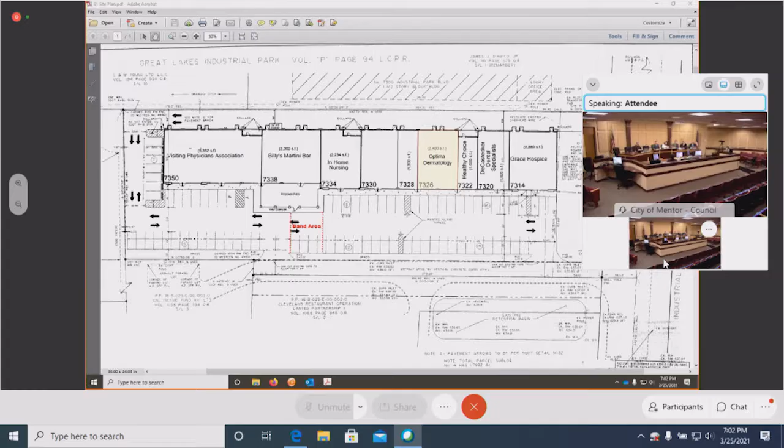Thank you. Please give us your name and address for the clerk. Yes, this is Scott Flivio. I'm the Director of Construction from Optima Dermatology out of Portsmouth, New Hampshire. Good evening, board members, thank you for this time. Thank you, please tell us a little bit about what you want to do. Yes, we're doing an interior fit up for a dermatology office. This is a temporary location where the doctor will visit their patients during the process of getting the new space prepared.

Okay, thank you. Is there anybody here that would like to speak in favor of this proposal? Larry? No one has put anything into the Q&A, but I do see the landlord's representative is online. I will unmute Urban now. Urban? Mr. Conaccione? I guess he does not want to speak.

Okay, is there anybody here that would like to speak in opposition? Okay, this public hearing is closed. Is there anything from the administration? Nothing other than what's been noted in the report. Anything from my fellow commissioners? All right, make a motion to approve? Second. Clerk, please call the roll. Mr. Tiedemann? Yes. Mr. Varga? Yes. Mr. Haddon? Yes. Mr. Perkovich? Yes. Mr. Cook? Yes.

Okay, we have a conditional use permit to allow a commercial recreational facility, karate and fitness studio, at 9107 Mentor Avenue. Is that applicant here? Larry? Oh, sorry about that, I don't see anyone for this request. There is a call-in user number 2, which I have just unmuted. If it's him. Oh, sir? There's a third call-in user. Oh, sir? Oh, they're gone. I don't see them online at all. You want to just come back to this then?

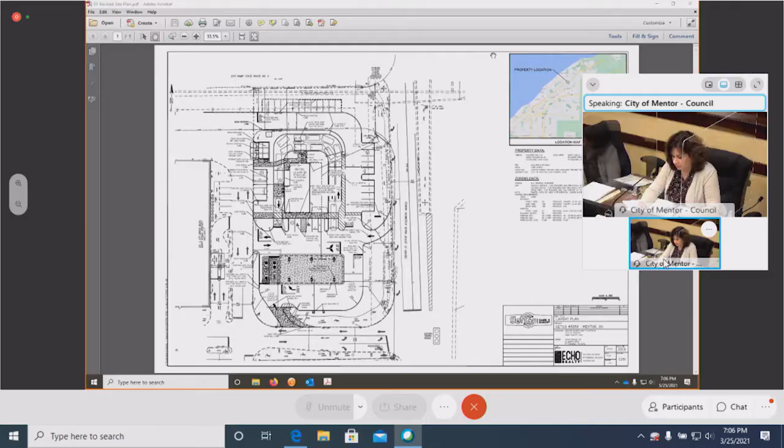Okay, thank you. Is there anything from the administration? Mr. Chairman, I would just point out the extension request that they submitted with regard to the previous site plan, final site plan approval that was approved at your March 5th, 2020 meeting, effective on March 27th, 2020. Per the code, the final development plan expires after 12 months unless an extension is granted up to 6 months. Okay, thank you. Is there anything from my fellow commission members?

I have a question I asked before, and I'm not sure I know the answer, so I'm going to ask it again. How is this building serviced? Where is the service location? How does a service truck approach the building?

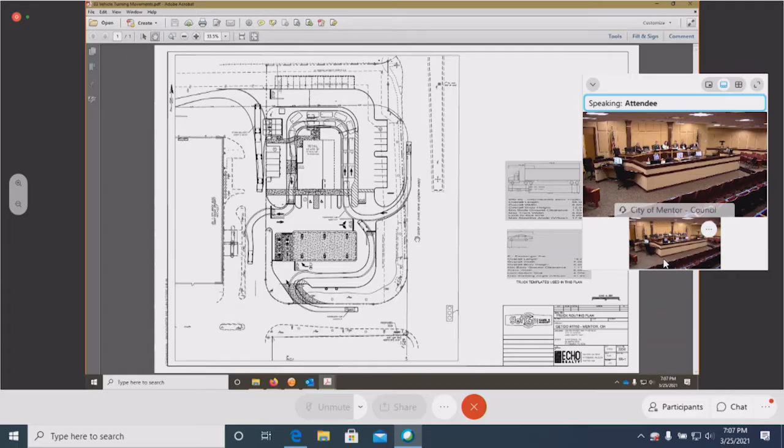If you look at the turning analysis, we show how vehicles and trucks could enter the site. These vehicles can pull up to the front of the building or to the side of the building to access it if anything needs to be serviced at the retail store.

Would that be taking place when the facility is open, when you have a drive-through condition going on? I'm just trying to understand how a panel truck or some type of delivery truck would be able to come in while you were having all this traffic going around the building with the parking spaces in front. Maybe you could illustrate where the truck would go, where it would park, how it would not be in the way of all the other traffic.

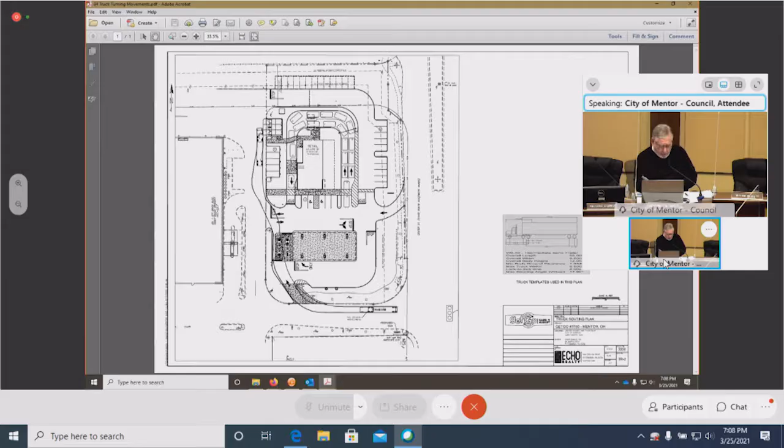If you look at the turning diagram, you can see that location can be used for fuel delivery as they come through, and also delivery trucks to pull up along the side of the building there. Timing of deliveries - when they could happen - we usually try to have them happen more in off-peak hours to not cause traffic problems within our sites. So that's kind of how we would move forward and work with that.

Just for clarification, when you say pull up next to the building - you have parking, you have a queue line all the way around the building. Where would this 'next to the building' be? It would not be directly up next to the building. You could pull up next to the dumpster area, in those locations there, it could pull around the building. It would not be in an area that would block any kind of traffic for the drive-through or flow around the site.

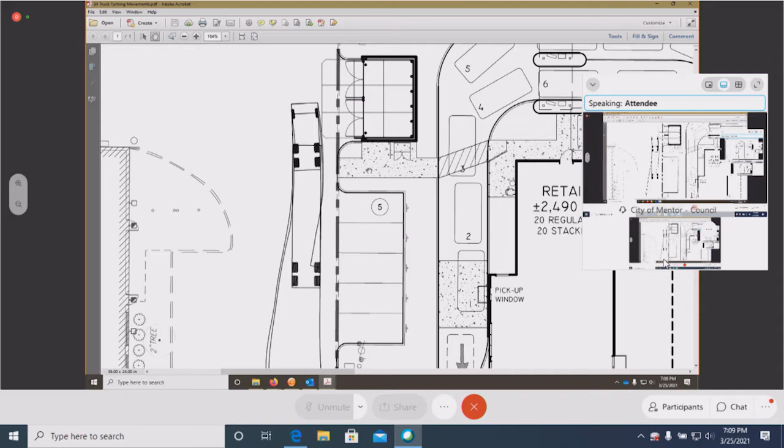Okay, thank you. Thank you. Is there anything else? Mr. Chairman, Mr. Haddon?

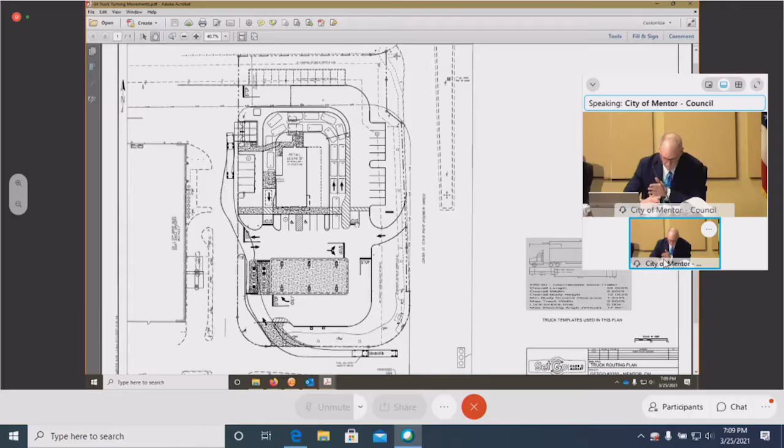I just have a question regarding the stop bars that you have relocated on this site. The one across from where the cars will pull into your drive-through - if a car is stopped there, how is that car going to make that turn where you show on the sheet, your truck routing plan? It seemed like that stop bar maybe should be moved to the west to accommodate a vehicle coming in there a little bit better. Does that make sense to you?

That stop bar is in that location by the entrance to the drive-through. We pulled it forward because we do have a crosswalk to allow better flow for pedestrians to access the store from those parking spots on the east side there. We do not want to put that stop bar behind that crosswalk - it's farther away from the intersection. So for us, that felt like the better location, pulling it up closer to make it more of a traditional feel of a traditional intersection at that location.

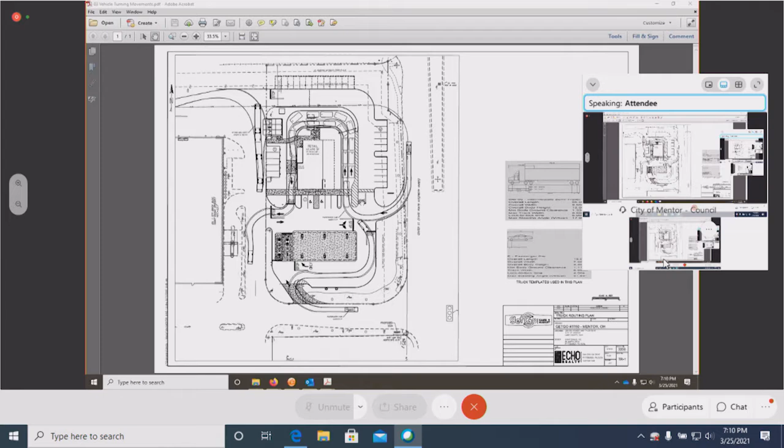And what about the stop bar by the gas pump there? Can that be moved to the west a little bit to accommodate a vehicle trying to get into your queue? We could definitely take a look at that with some more analysis. We tried redesigning this intersection, making it as much a feel of a four-way intersection as possible, for allowing entrances for people coming off of Center Street, or if they're coming from around the pumps into that drive-through area.

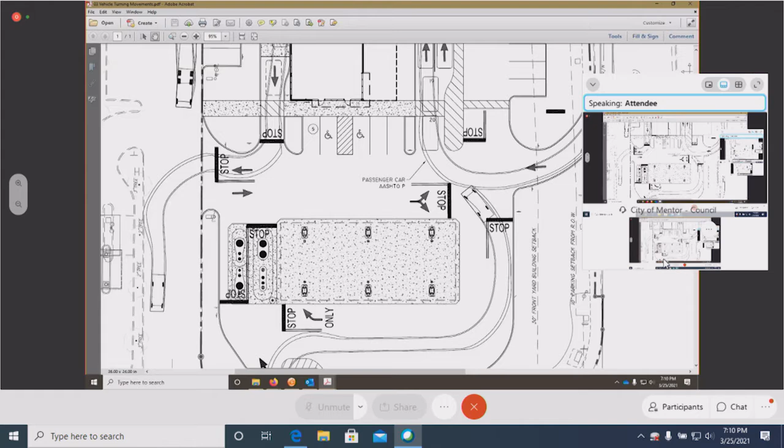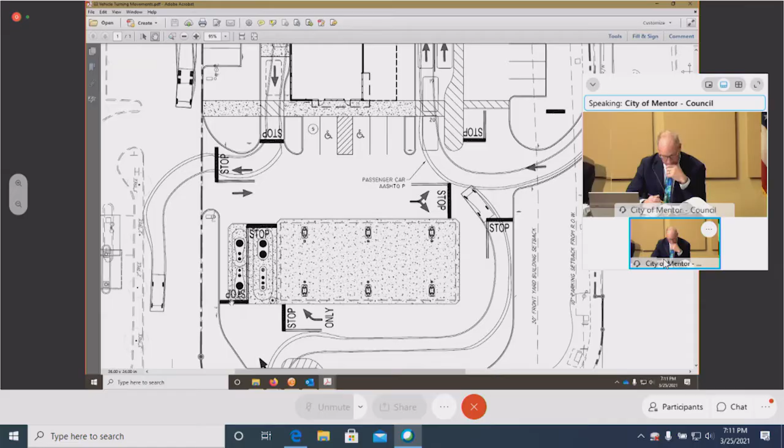Then my other question is the stop bars over where the tanks will be filled, the gas tankers - would it make sense for all that traffic on the east or west side of those gas pumps to just all go to the north instead of trying to do north and south there? We could take a look at that. Again, that's one of those things of using some signage and those stop bars to try to create flow in that area. That's something we could take a look at.

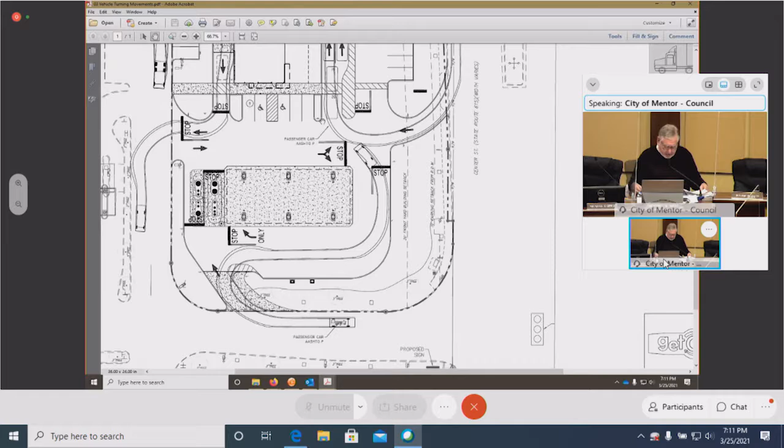Mr. Varga: Along the entrance to the queuing line, there's a section of striped area, like an island. Is it just striped? Correct. Is there a reason why you didn't continue the island from the north to make it a curbed island to contain that? What's your thought there?

That area is not made fully curbed to allow people in the drive-through, if they realize they don't have their wallet, an area to pull out of the drive-through.

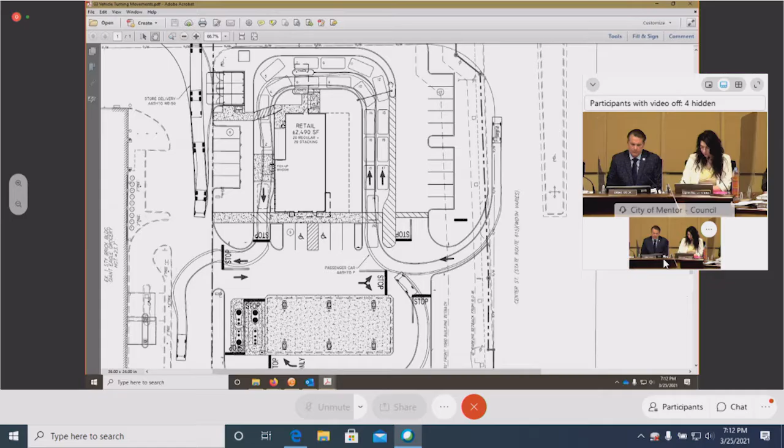I got a quick question. As you come through the drive-through, is that a height restriction bar right as they start? Is that a raised curb to the right? Yes. So if they hit the height bar and can't make it, how do they get out of there? You'd have to back up, right? That would be yes.

But if they have cars behind them, they can't back up. So your height restriction bar needs to be at a point where once they realize they're too high, they can bail out. You follow me? We can take a look at that, of course.

You have an approval from the last go-around. When do you know which one you're going to build? What do you think the time frame is on this prototype versus the one previously approved? The decision on whether to move forward with the previously approved plan or this plan will be made within the next few months. We'd only have 6 months maximum as an extension from the planning commission, but that decision will be made within the next few months.

Okay, thank you. Is there anything else? Well, this hearing is just for the preliminary site plan, but you did provide some additional adjusted architectural elevations. Yes, correct.

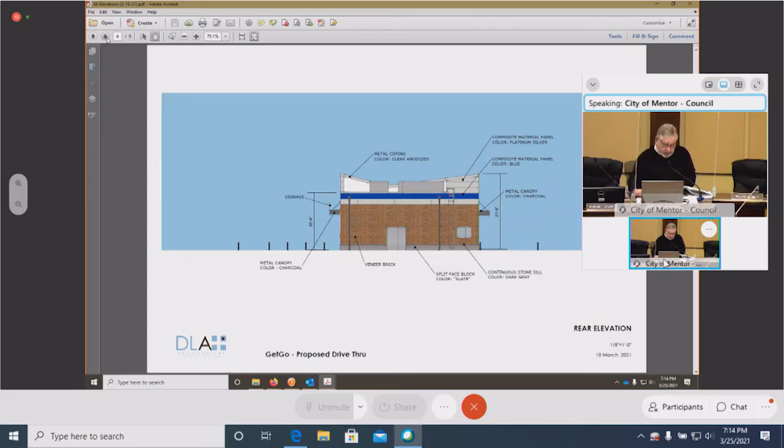And you did show brick on it. There had been a request for brick, and in general I don't have any issues with the building, except for one thing. On the front elevation, you see mechanical equipment sticking its head up over the top. We look for about 6 inches of cover on the mechanical equipment, but mostly on the north elevation, easily seen from Center Street, you have absolutely no cover, no curbing or parapets, and the units are completely exposed there.

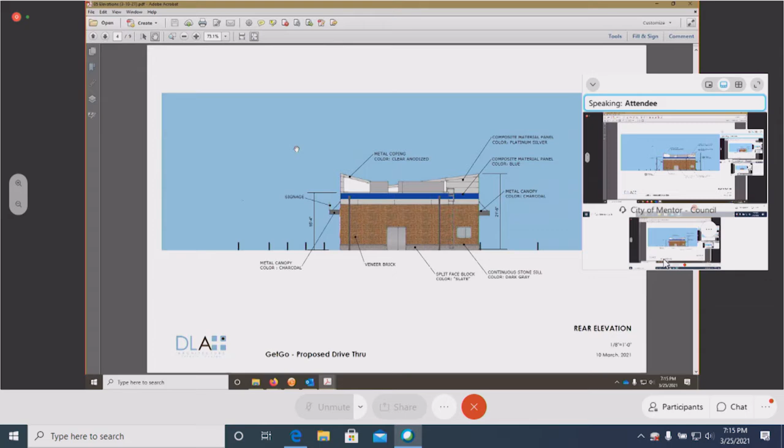So we would expect you to provide a proposal where we don't see all these big mechanical units on the roof. You're basically in an environment where this can be seen from all four sides. That's something we can take into account moving toward the final plans. We can take a look at that. All right, thank you.

Anything else? Can I get a motion? I make a motion to approve with five proposed conditions. Second. Clerk, please call the roll. Mr. Tiedemann? Yes. Mr. Varga? Yes. Mr. Haddon? Yes. Mr. Berkovich? Yes. Mr. Cook? Yes.

We have a miscellaneous review of an outdoor storage— oh, I'm sorry, that is tabled. Item number 4. Excuse me, Mr. Chairman, the applicant for number 2 is now online.

Well, that's great. All right, please state your name and address for the clerk. Kenneth Wilson, address 9107 Mentor Avenue, Mentor, Ohio. Thank you, please tell us a little bit about what you want to do.

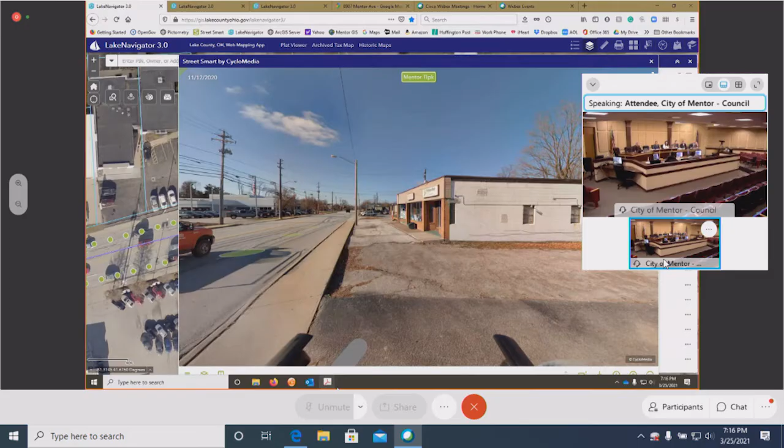I am proposing to open a karate and fitness studio. It's going to be a small studio. Right now we're looking at classes no bigger than 10 students a class.

Okay, thank you. Mr. Chairman, I know we touched upon it earlier when this was first called, but perhaps for the benefit of the record, let's check if any members of the public want to speak in favor or against this proposal. No one has typed into the Q&A wanting to speak for or against this request. All right, thank you. This public hearing is closed.

Kathy, is there a general code on parking material, on what the parking lot needs to be made of? Yes, there should be improved parking surfaces approved by planning and engineering, either asphalt, concrete, or approved pavers. In this instance, we're dealing with existing parking lots.

It sounds like from the conversations we've had with the property owner, there's some shared parking with regard to the parcel to the east, as well as to the parcel immediately to the west, next to the barber shop. The current property owner of the subject building owns the 3 parcels where the karate studio is proposed, the adjoining barber shop, and the property behind. The mobile home park owns the property to the east, and we received a letter from the property owners of the mobile home park indicating that the parking lot you're seeing on the screen is dedicated for the use of the businesses there. It always has been. They have no use for those parking spaces for the mobile home park.

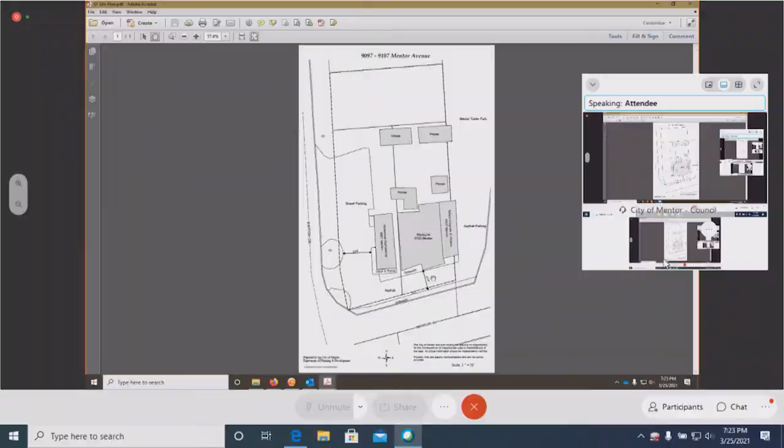We also utilize the front parking spots. People drop off stuff, so they come in and park in front of the store, but it's all short term since they're in and out. Mr. Wilson will probably be here about an hour, so his clients coming and going will be there about an hour. We've counted that we can park at least 9 cars on the side of the building, even though they're not marked, and we've been doing this for 31 years with no issue.

But we can get signs to post on the side of the building to direct people where to park.

Well, I don't want to be argumentative. I understand the predicament, I understand the physical condition. For instance, a 17-foot driveway in the front is not wide enough to have parking and a driving lane. A driving lane has to be, well, a parking space is about 9 feet, and the driveway would be 10 or 11 feet at the very least. So you can't park in front of this building.

Well, there's curbing there, I don't think you can anyway. You can drive through, but you can't parallel park. And what I'm saying is you can't drive through because if a car parks there, it effectively blocks the driveway. I agree, if somebody parks in front of that, that's where they're going to block it. But Mr. Wilson's planning on putting signs on the building itself pointing from one edge to the other edge to limit his parking to that side of the building.

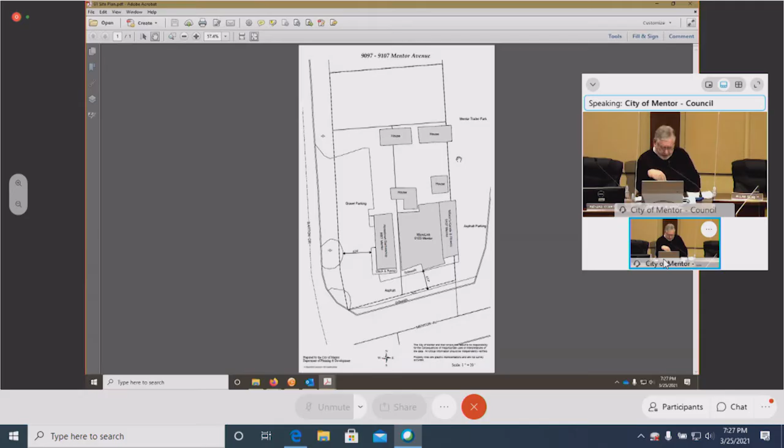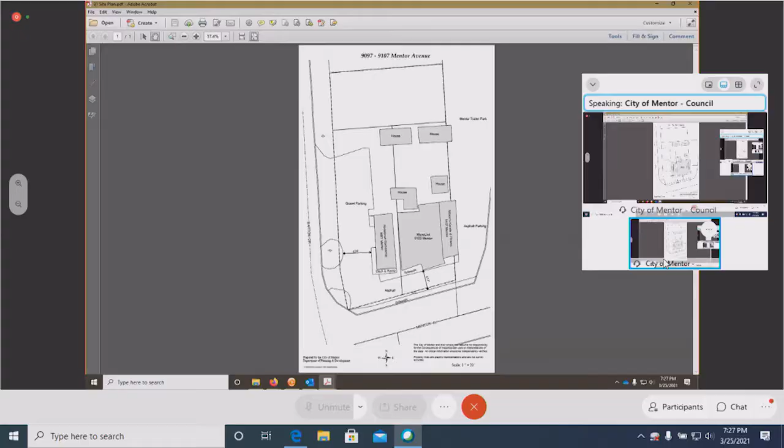So they need basically a plan, a similar drawing to what you have on the screen now, showing where the parking spots are located on each side of the building—for this facility, for the houses, for Microlink, and for the barber shop. Right now we don't know what we're looking at, and we need the overall picture in order to approve this part. Some of these spaces may actually be required for the other tenants to fulfill your parking requirements, so we need a more detailed plan.

I'm not saying no, I'm trying to think of a possibility. Maybe with the parking spaces on the east side, instead of putting up signs, you could put vertical painted lines on the building showing where the parking spaces are, so people have a chance of knowing where to park. That's just my personal opinion—I don't think it meets any city requirement, but unless you can get the guy to pave the parking so it can be lined, I'm not sure how we can back into this.

We've talked to Sparky about that, and we've been dealing with him for 20 years, and he's not going to put any money into that parking lot. Well, but now this parking lot is germane to your occupancy. Correct, we've used it ever since we bought the building—it's been our parking lot, and we pay him for it every year to have that right.

Then I'm going to suggest we table this at this meeting until we get another document showing where the parking spaces are and the improvements necessary. Fine? Can I get a second? I'll second—there has to be a drawing.

Clerk, please call the roll. Mr. Tiedemann? Yes. Mr. Varga? Yes. Mr. Haddon? Yes. Mr. Berkovich? Yes. Mr. Cook? Yes.

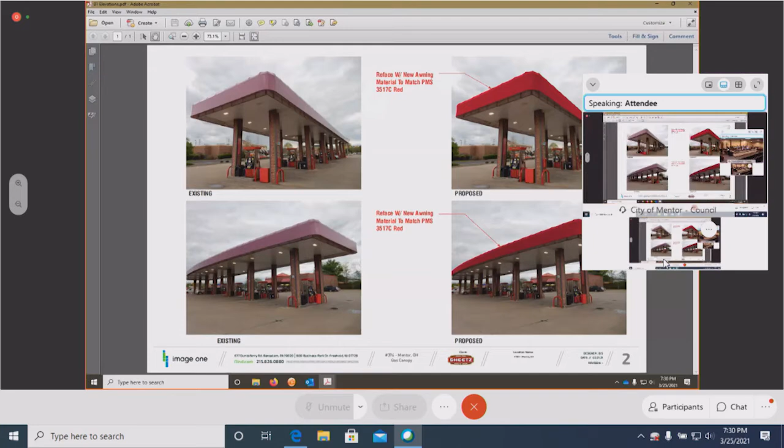What we're proposing is to recover the existing gas canopy, which is currently a burgundy red, color 2020 burgundy red. This is unlike any of the other Sheetz stores. Throughout their six-state footprint, the proposed color we want to use, PMS 3517C, is a brighter red—this is their corporate color, and it's what the majority of almost all their stores look like. This burgundy one, back in 2006 when we built the store, I believe the city was asking for a different color.

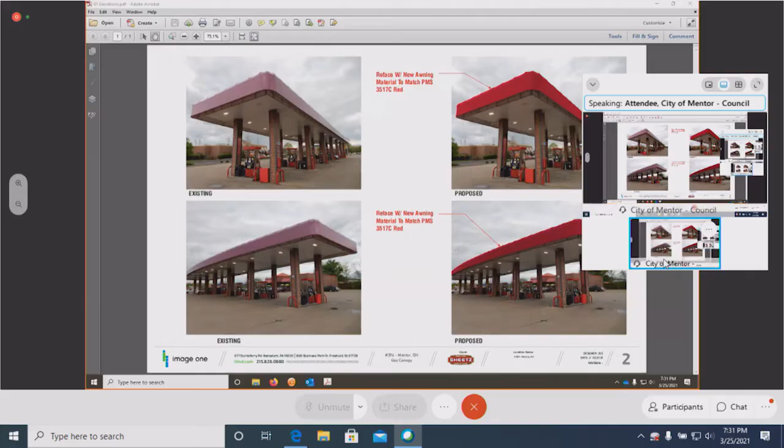Okay, thank you. Kathy, anything from administration? No, nothing other than what's noted in the report. Thank you. Anything from the commission members? All right, can I get a motion?

Motion to approve with one condition. Second? Clerk, please call the roll. Mr. Tiedemann? Yes. Mr. Varga? Yes. Mr. Haddon? Yes. Mr. Perkovich? Yes. Mr. Cook? Yes. Thank you. All right.

Preliminary site plan of a medical office building at 7676 Reynolds Road. Larry, is that applicant here? I'm going to unmute Scott again.

Good evening, board members. This is Scott Filliu, Optima Dermatology out of Portsmouth, New Hampshire. Please tell us a little bit about what you want to do. This will be a permanent dermatology clinic located in Mentor, Ohio. We have our civil engineer on the call also, and we can go through the civil design. Okay, thank you.

Larry, you want to unmute? Brandon? Is this Brandon? You could also go ahead. Max, who's the CEO, and Mitchell Harvey is on the line. He's been a representative for the applicant. And Brandon's here as well, thank you. I've unmuted Mitchell.

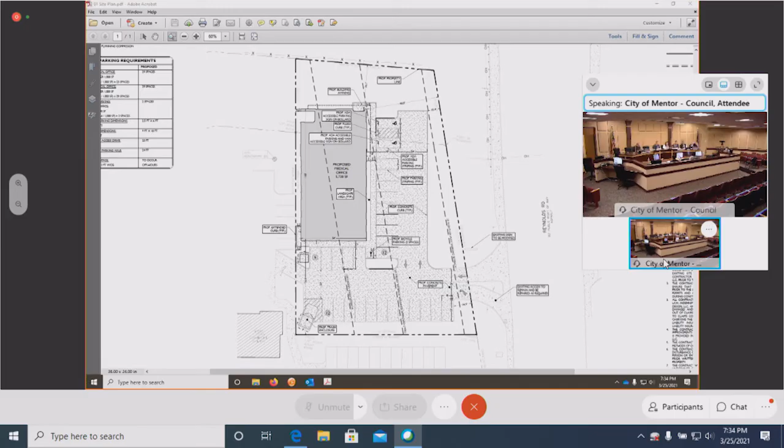Mitchell Harvey with Stonefield Engineering, 607 Shelby Street. I'd first like to thank you for being able to present in front of your board tonight. The site is located just to the northeast of the existing Bob Evans restaurant. I'll be fairly brief on the overall site plan because it's largely going to maintain the same traffic circulation as is currently out there. But the overall proposal is to redevelop the site.

The proposal is for a 5,738 square foot medical office with 29 associated parking spaces. The primary access point will be through the existing curb cut onto Reynolds Road, and we are also proposing to maintain the cross access with the Bob Evans parking lot to the west of our site.

The landscaping plan we propose will be a mixture of evergreen and deciduous tree species, as well as proposed foundation plantings across the facade facing Reynolds Road, so you'll be able to see it coming up and down Reynolds. Touching on utilities and stormwater, we have designed an underground stormwater detention system that meets all of Mentor's stormwater ordinance requirements, and we will tie in all new utilities to the existing utility mains within Reynolds.

So with that, I'd like to turn it over to Bo Wynn with the Detroit Architectural Group, who will take you through the elevations of the proposed building. Thank you. Hello, I believe I'm unmuted now. Yes, thank you so much. Very happy to join you this evening. Hey Mitch, if you could pull up the elevations, thank you sir, appreciate that.

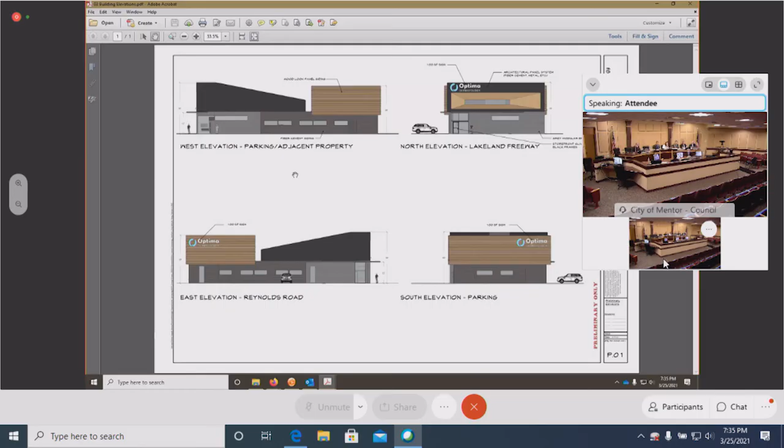I believe Max, one of the owners, is going to give a brief on the operations for this facility. It's a dermatology facility, dealing with skin. When we were commissioned to do the design, he wanted it in layers, so that's what we were challenged with—a layered building with many materials. Your skin is made up of a couple different layers: the epidermis on top, the dermis in the middle, and the subcutaneous below.

The epidermis is the pretty side, the side you touch, see, and feel the most, demonstrated here by the upper portion—you can see the wood, a natural, softer material in light tan. The darker wedge shape is also wood, representing how some folks have more melanin within that epidermis layer, so several colors of wood represent the dynamic spectrum of melanin in skin colors. Working down into the dermis layer, that's represented by the fiber cement siding—not quite as hard as masonry, but a supportive structure.

And I would just like to point out as well, we are going to support this fiber siding on the bottom, probably go around the base of the building with a little more masonry. The elements in northern climates don't play well with fiber cement siding, so we're going to get a good durable material around the base perimeter of this building and drop that brick down. And then last but not least is the masonry portion, the modular brick, representative of the subcutaneous layer. So that's the kind of layers represented in the building.

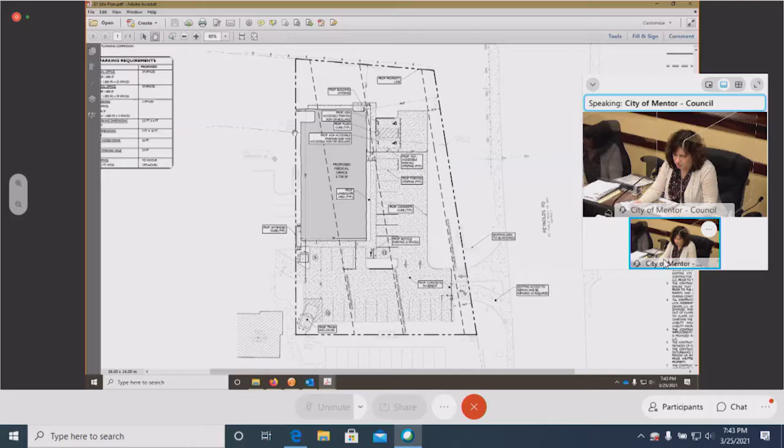I would only note the issues raised in the analysis page of the report regarding title discrepancies currently under review by the applicant's representatives. That's a little unique to the site. If you look at the ALTA survey versus the site plan, you can see the delineation of the 60-foot easement area, and the building proposed is actually within that easement area. That's an item we will need to have clarified moving forward.

Thank you. Anything from the fellow commission members? Mr. Chairman, I have one question for the applicant. The west driveway, the exit or entrance in the rear or side of the building, can that be made two-way? I know you're working with Bob Evans over there, but is there a way to make it so two cars can pass at the same time?

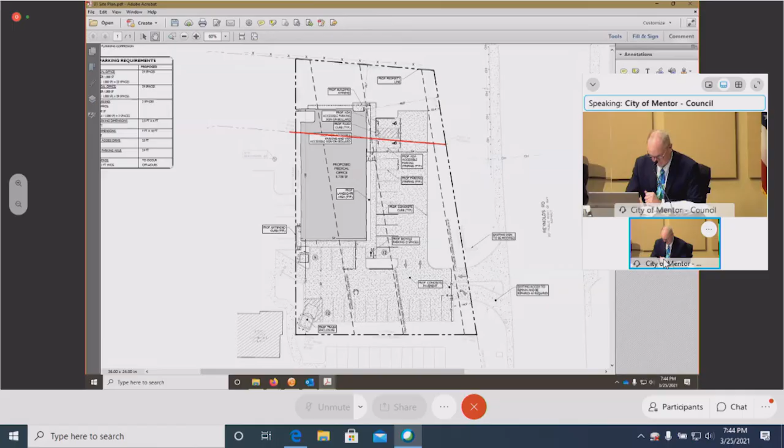Can you hear me? This is Mitch with Stonefield. Yeah, we got you. We can look into widening it, but ultimately on the west side our property onto their property is narrow, and they have a light pole there. So if we wanted to widen it on their site, it would have to extend further south, requiring relocation of the light pole, which I don't think they'd be overly thrilled about. Okay, thank you, but you'll take a look at it. Yeah, we'll see what we can do. We'll reach out.

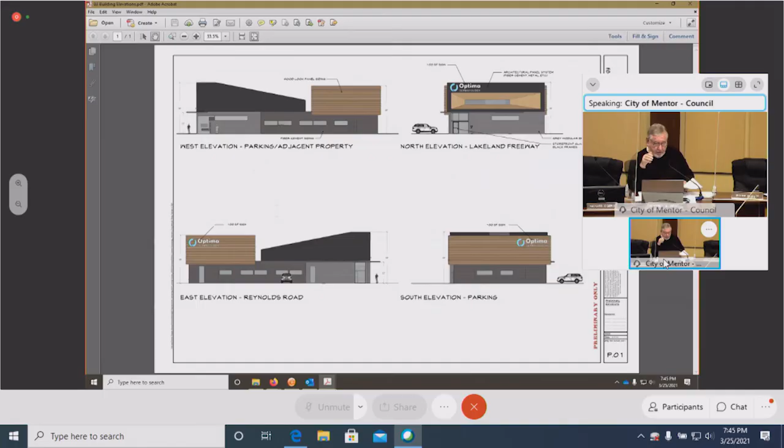Mr. Varga? Mr. Chairman, I just have a couple of reactions. One is the typical one, which leads to a question right now: where are the mechanical units? Are they on the roof? Yes, they are. And are they completely hidden 100% with these elevations, or would they be visible if placed on the drawing? That's a great question.

Per your comments, there's a little gap between the black wedge and the wood. Aesthetically we thought that'd be nice, but now that we're getting into construction drawings, practically we're going to have to bring union between those two elements and close that gap. So indeed, they will be 100% screened after that. That would be our requirement, yeah, we focus on that.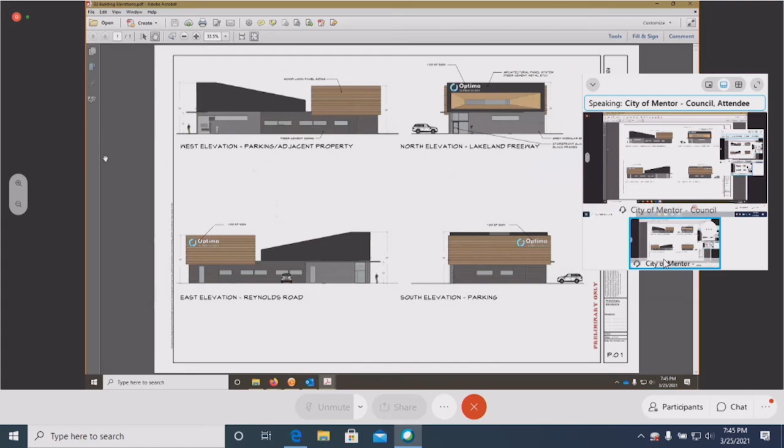Now, I just have a reaction on the site planning of the building. I'm not necessarily making it a requirement, but I noticed that from all your parking spaces and driveway areas, you cannot see the entrance of the building. Your building entrance is on the north face, and no one driving to this building can see the entrance. Does that concern you?

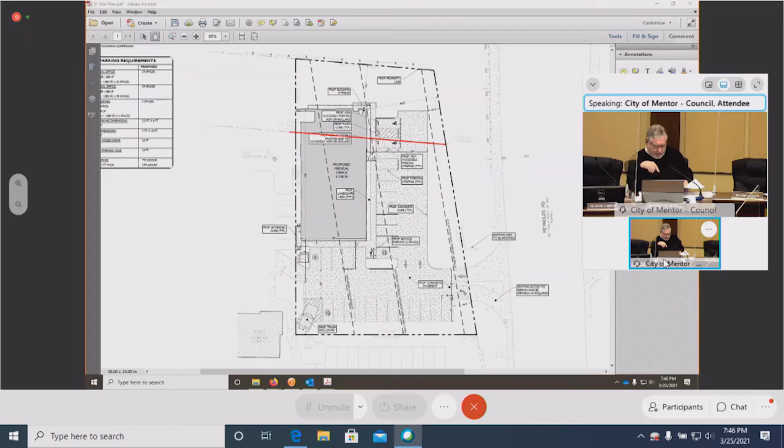It doesn't, from a civil site perspective, concern us. No, I understand, but from the parking layout, just from the functionality of the building, no one can see where the entrance is. Typically you park your car because you want to be by the entrance, and when you get out you know which way to walk. Is there going to be anything to allude to where, since the entrance is around the corner on the north side, and then there's another entrance on the northwest corner that's recessed. Is that for staff? Is that a staff entrance?

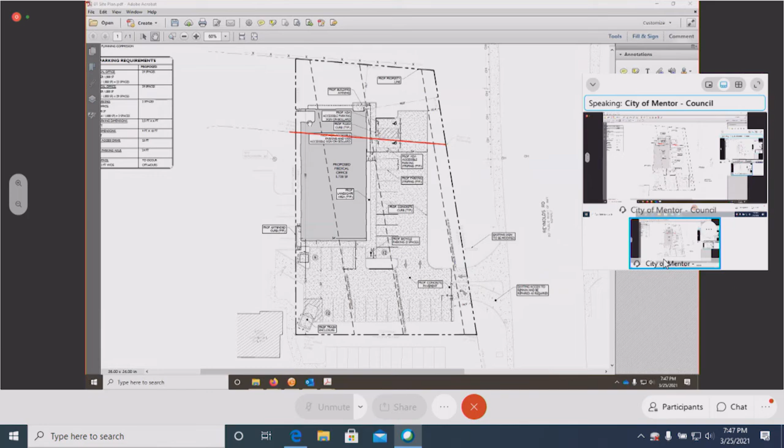That area in the northwest is actually an outdoor planting area. Okay, so that's not necessarily a building entrance. I'm not bringing this up to suggest you change the design of the building. I'm just noting that your building entrance is not visible from any place in the parking lot. And it faces north, which in this climate is the worst place to put an entrance, because the wind blows out of the west, northwest, north, and northeast here, and you'll be shoveling snow out of that alcove for the rest of your life. So it's just an observation. I don't know if you thought about it, or if it became obvious that no one can see the entrance from the parking areas where your customers park.

That's all, thank you. Just one other thing - I forgot. In lieu of your cement fiberboard siding, which you've acknowledged may not be the best thing to go down to the ground, could you replace that darker gray color with more modular brick, just a different color or size? Could you eliminate the cement fiber siding and use another masonry material that would give you the same appearance?

Great suggestion, actually we were discussing that earlier today. If I could ask a question, are we required to do all brick or masonry, or is HardiePlank an allowed material?

We have a suggestion about the percentage of brick required - is that for residential or commercial? The simple answer is, and we can get into details later since this is just preliminary, yes, we have a concern about the percentage of brick and masonry on the buildings. Right now you have a certain portion of it, but I have a feeling you might want to increase that to meet the requirement.

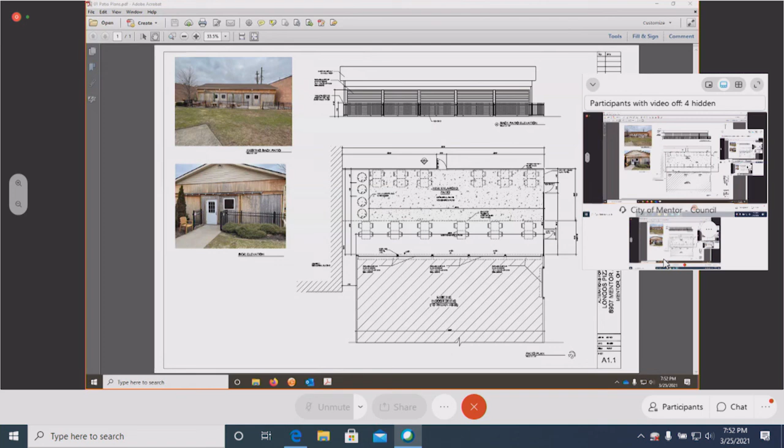Obviously the older doors you're seeing are temporary - we put them up in the winter to protect the interior space, and we still have seating in there with some heaters. But we're proposing to change those to roll up permanent doors. It's time to replace the ones that are there - they're pretty nasty, so we want to make the investment so we don't have to keep replacing them.

Thank you. Sure - Kathy, anything from administration? No, nothing other than what's noted in the report. Thank you, anything from fellow commission members?

No. Okay, thank you, can I get a motion? I'll make a motion to approve with 9 conditions. Second, clerk please call the roll.

Mr. Tiedemann? Yes. Mr. Varga? Yes. Mr. Haddon? Yes. Mr. Perkovich? Yes. Mr. Cook? Yes. Thank you very much, good luck. Thank you, appreciate it, have a great night.

Director's report, Kathy? Nothing at this time. Okay thank you - motion to adjourn? Thank you.